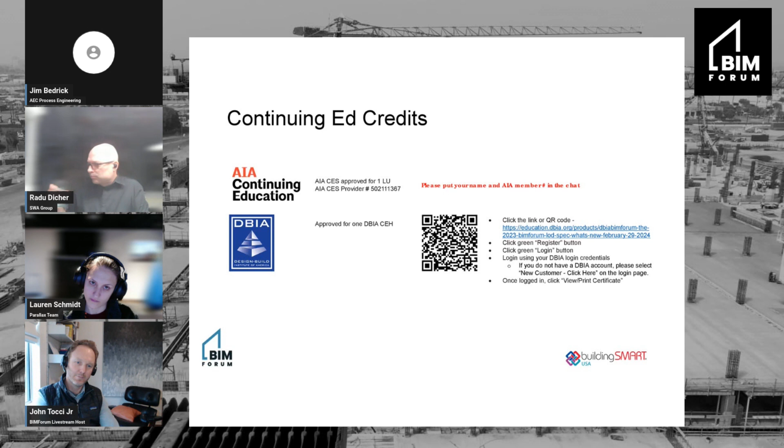So I'm Jim Bedrick. I've been leading the LOD spec effort since its inception about 2011. I'm an architect by trade, but I've worked all three sides of the industry, so I get all of that perspective. And then I also spent 13 years on the AIA Contract Documents Committee, so a lot of that has informed the development of the LOD spec.

We also have Lauren and Radu here from the American Society of Landscape Architects. So Lauren? Oh, we're doing introductions. Yes. Hi, I'm Lauren Schmidt. I'm a landscape architect at Parallax team. And yeah, we are a small BIM consultancy. And I'll let Radu introduce himself.

Thank you, Lauren. Yes, Radu Dicher. I'm the firm-wide BIM manager for SWA Group, the largest landscape architecture, urbanism, and planning office in the US. I basically started in the architecture realm, spent a lot of time in MEP after that, having a background in physics. MEP BIM management is the longest stretch in my career, and 4 years ago I joined SWA to assist with BIM implementation for the landscape architecture projects. Thank you. Okay, thanks, guys.

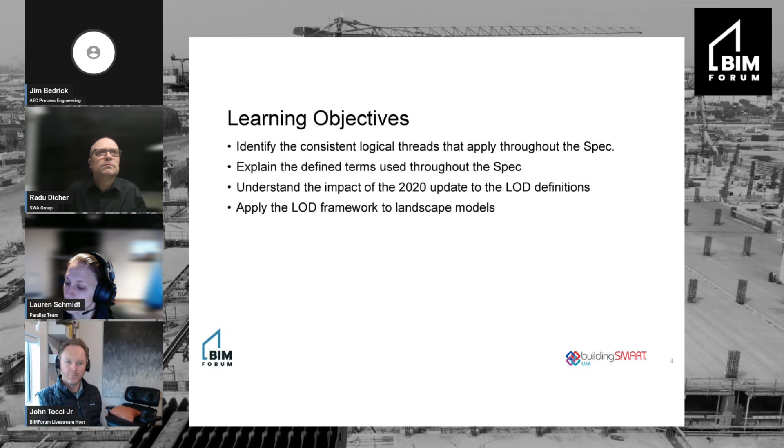So getting right into it, what we want to learn here is, first of all, there are some consistent logical threads that go through the LOD spec, and those have been firmed up for the 2023 version, and we want to be able to identify those. And we've also added a section on defined terms, which we'll get into in more detail. We want to understand the impact of the 2020 update to the LOD definitions. And then we want to get into applying the LOD framework to landscape models, which turns out to be a little bit different animal and was really an interesting and fun endeavor.

So the agenda, we will look at, first of all, what is level of development. Apologies to those of you who already know all about what it is. We usually find in every audience there are a few people who don't know what it is, haven't run into it before. There are some slight misconceptions a lot of the time, so we need to make sure we're all on the same page there.

We'll look at the LOD definitions, how they evolved, and then the 2022 definitions, and the interpretations that BIMForum have made for those definitions to guide the development of the spec. We'll look specifically then at the BIMForum LOD specification, and we'll look at the enhancements that we did in our overhaul for 2023, and then we'll look at those defined terms, and then we'll hand it over to Radu and Lauren to show what we did with landscape architecture.

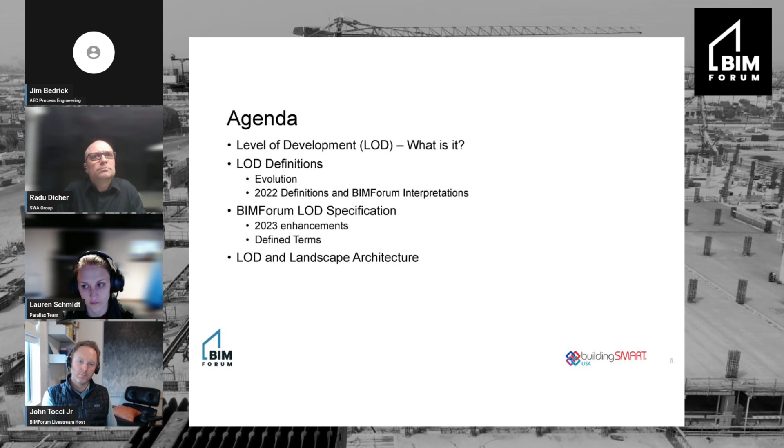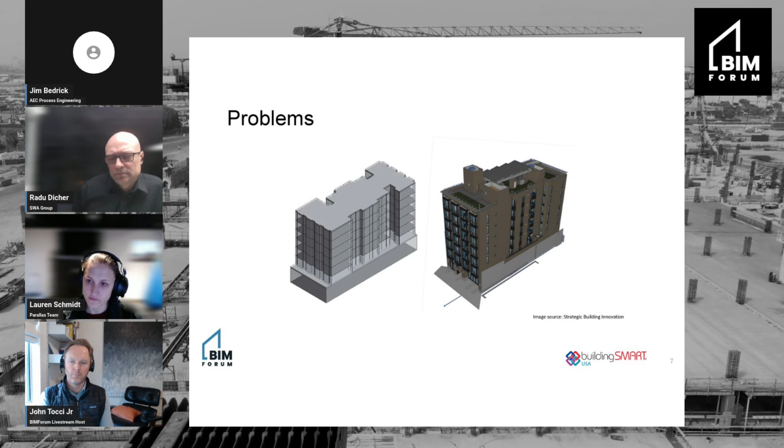So what is LOD, right? Well, it starts out with, we looked at the problem here, which one of these is a BIM, and actually, of course, the answer is both. But given that, then how do you know what you want in a model? How is an owner able to define what they want in a model? How is an architect able to know that they're meeting their deliverables? And the big issue is, how can you rely on a model?

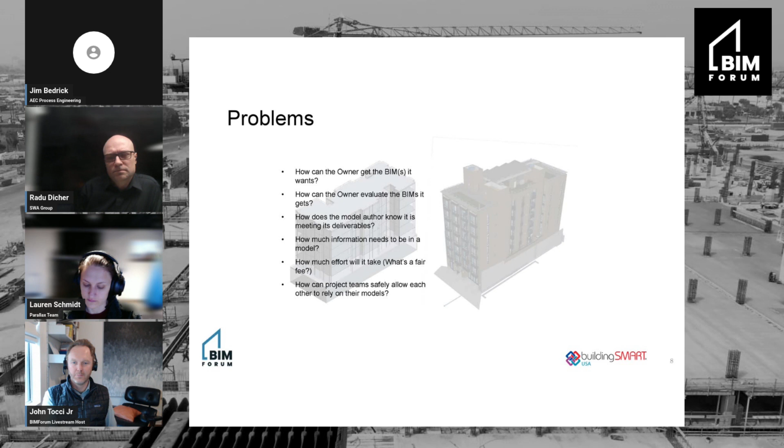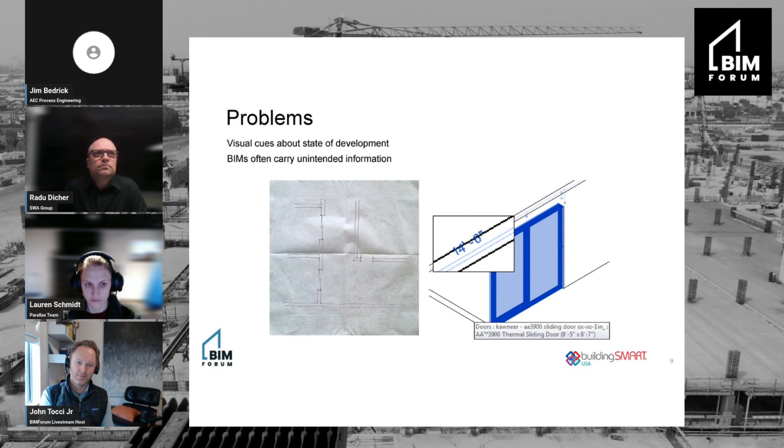So some of the problems that we saw were that when we were dealing with paper, we had visual cues about the state of development. If it looked like the thing on the left, we knew everything was approximate. But the problem is with a model, whether it's at the napkin sketch stage or the final CDs, it looks like the thing on the right. And the model can carry a lot of unintended information. I may have grabbed that door as a placeholder and it happens to be a Kawneer door, but that's not what I'm going to spec. So there's a lot of information in the model that I don't intend, and a lot of information I don't even know about.

So the response to this has usually been this disclaimer that says, pretty much the model looks great so you can look at it, but you can't use it for anything or rely on it for anything, which includes but is not limited to everything. And there's usually some legalese in there that says if you do use it for something and get me in trouble, then you got to pay my lawyers. So have a nice day.

What that boils down to is that everybody was saying, okay, well, some of the information in the model is not reliable, so don't rely on any of it. So basically throw out the baby with the bathwater.

In the AIA, when we got a hold of it in the AIA Documents Committee, we developed this specified use approach. And we said, yeah, some of the information is not reliable, so only rely on what I say you can for the purposes I say you can and to the degree of precision I say you can. So if I've got to specifically tell you that you can rely on something, when I don't mention something, it's something I don't know about, I don't say anything about it, you automatically cannot rely on it. So you don't get me in trouble.

So how do you state all that? What you can rely on and to what degree? That's where the LOD schema comes in. So things progress, systems progress through the design process in varying rates. Usually structure leads everything, interior finishes and casework bring up the tail. So at any given point, things are going to be at a different state of maturity. They all, though, tend to hit some pretty common milestones.

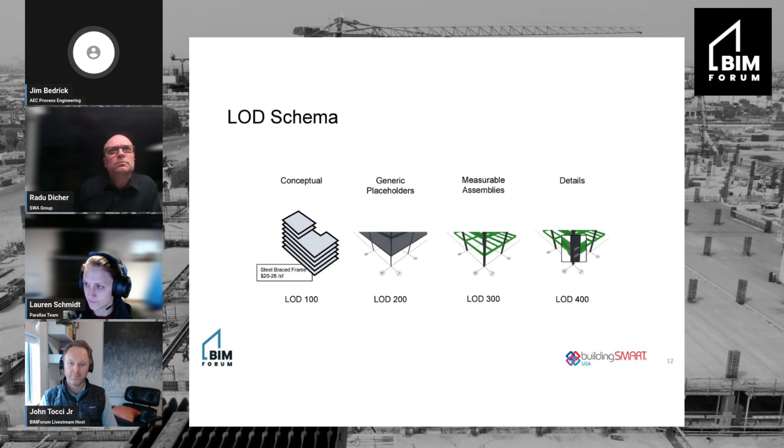You start out with a concept, which might be a cost per square foot on a massing model. You then go further on into putting in generic placeholders. That might be like a rule of thumb depth for the steel floor. And then you get into the specifics. You put in the specific elements that you actually want in the design. And then sometimes you carry those on to further details.

So what we deal with in the level of development spec is this idea of level of development versus level of detail. And it's a really important and sometimes misunderstood difference. Level of detail is basically the quantity of detail. So if you look at this model of a steel structure, it looks like specific steel shapes, right? I mean, they probably are specific steel shapes because I grabbed them from a library.

I can measure their location precisely, but have these shapes been engineered? Are they the ones the engineer calculated out and really wants? And are they in the location that they should be in? I can't tell that by looking at the model. Visual cues aren't there. So I need something else, and that's where the level of development schema comes in. Level of detail is the quantity of detail. Level of development is the reliability of it. So level of development then addresses those last two questions and many like them.

And so has the shape been engineered? If it's LOD 200, no. They may look like specific steel shapes, but they may change. That's not what I'm going to wind up using. And are they in the final location? No, not necessarily. But if it's a 300, then I know, yes, those are the right steel members, and they are in the location I intend.

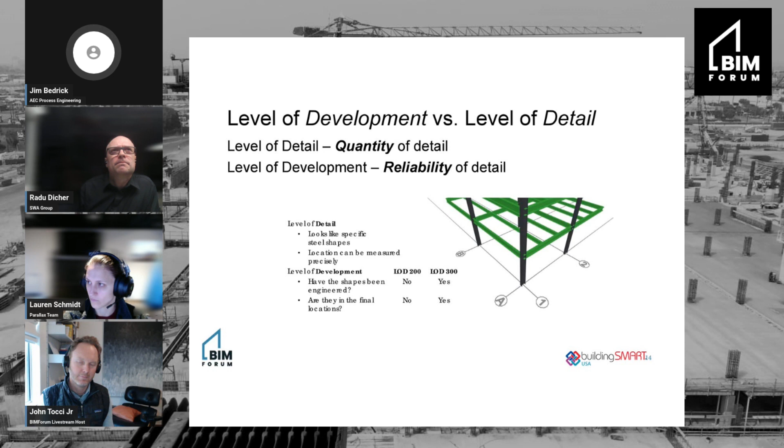Okay, so what can you do with this LOD scheme? You can define deliverables. You can define milestones, like SD, DD and CD, or even 50% of those. You can define information exchanges, such as energy simulation or costing or so on. And you can enable others to rely on your model. So specifically then, you can take a look at this in the handout, but there are a lot of things that you can do with them.

Some of the more useful ones is you can lay out your firm's standards. You can define what your firm means, your firm's business as usual, what we mean by, say, SD, DD, and CD, or as a construction company, what do I need in a construction level coordination model? All right, you can also do a number of different things. One of the key points is you can scope a modeling effort. You can develop what exactly I'm going to have to model, and not model a bunch of extra stuff that nobody's asking for.

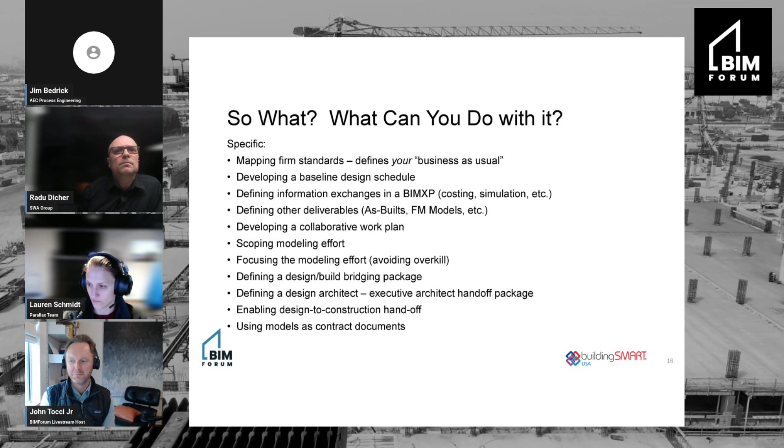Okay, so the LOD definitions. The evolution, first of all, it started back in about 2005 with Graphisoft, and they developed the level of detail scheme to basically control or manage their internal modeling efforts. Well, I was working with Graphisoft at the time, so I took that to the AIA California IPD steering committee. We were looking for something like this, and so that committee morphed it into something more usable, more generally applicable.

And we published it in AEC Bytes in 2008, and the AIA Documents Committee got a hold of it and drafted me to help implement that in a contract, and that's when I started with the Documents Committee. In 2011, then, the BIMForum got together and developed the LOD Spec, and we'll get into why that happened here in a minute.

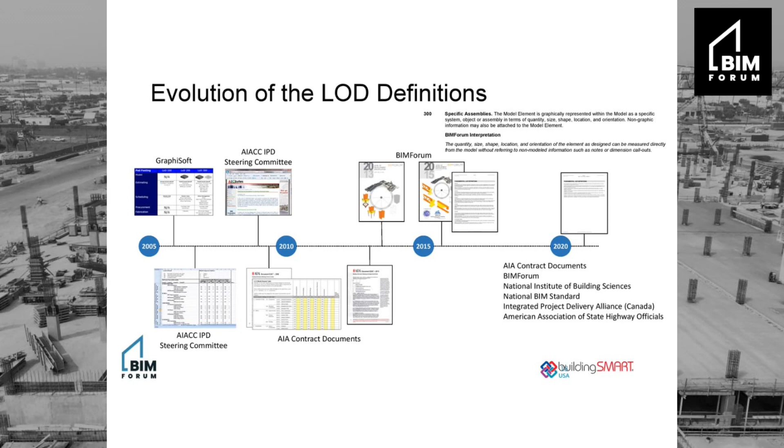In 2013, we developed our interpretations of the LOD definitions. The major one was that we said that at LOD 300, you can measure that element directly off the model. You don't have to depend on called out dimensions. Well, that caused a lot of heartburn at the beginning, but as we went down the road, a lot of designers realized that this is going to save me a lot of work, not having to lay out these dimensions, just putting them accurately in when I'm supposed to anyway. So it became a fairly well accepted principle.

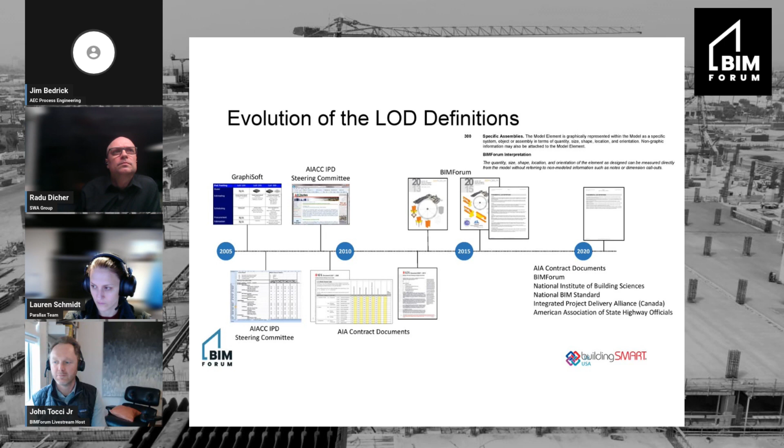In 2020, then, at the beginning, we convened a committee of a lot of different organizations that you can see there, to update the definitions. And what we wound up doing, that committee basically ratified the BIMForum's interpretations and folded them into the new ones.

Okay, so the 2022 LOD definitions. First of all, LOD 100 is pretty much the same as it was. A little bit more detail, but basically it's pretty much anything that's less than recognizable geometry. So anything like a symbol that indicates the location or the existence of an object, or say a space reservation volume. You say, I need a cube this big. I want to make sure that that's a no-fly zone because I might put something in there. Anything that's not recognizable geometry, but you can derive it from the model, is LOD 100.

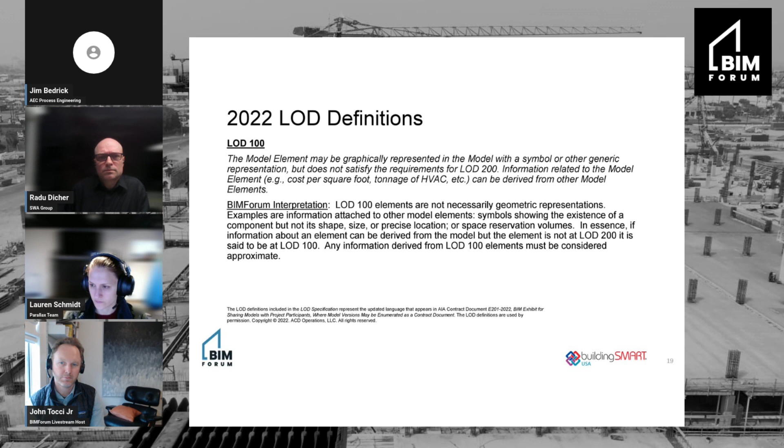200 then gets to recognizable geometry. It's probably a generic placeholder. It's pretty approximate, but I can recognize it. I can see that it's a beam or a light fixture or whatever. 300 then gets to the measurable element. So the definition specifically is the model element as designed is represented within the model such that the quantity, size, shape, location, and orientation can be measured. So that was the BIMForum interpretation of 300 rolled into the AIA contract documents definition.

So basically, our interpretation is that a 300 element is developed sufficiently to fully convey the design intent. Right? Given that, it's usual that designers don't go beyond 300 because they've reached their design intent. Neither the definitions nor the BIMForum specification say anything about who develops the element, but the usual practice is that designers don't go beyond 300.

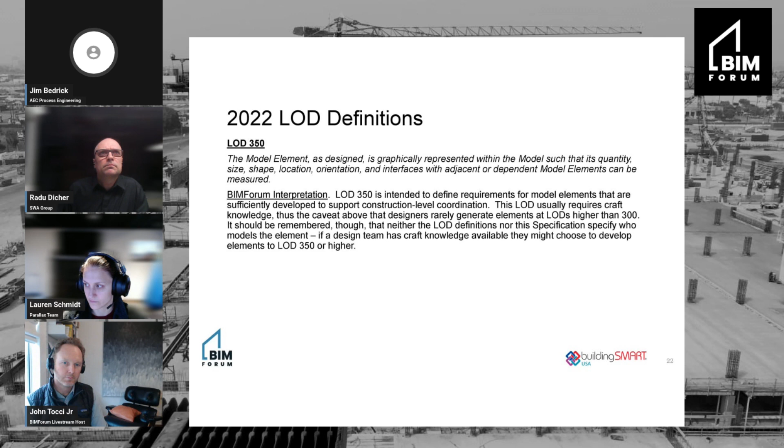350 then is the level needed for tight construction level coordination. And the thing is that 350 usually requires craft knowledge to develop. So seeing that, you can see why designers usually don't go to 350. Nothing prevents them from doing that. For example, if you have a design-build mechanical firm, then they are going to have craft knowledge in-house, and they may well take some of the elements in their contract documents or contract drawings to LOD 350.

400 then is a shop drawing level. So usually what happens is if the specs call for a shop drawing of a certain item, you might model that element at 400. And the thing to note here is that very few things in a model ever get to 400. You'll see sometimes people want to require models with everything at 400. That's unrealistic. Most things in a design model will be at 200 and 300 and even some 100s. In a construction model, they may get to 350, but very, very few get to 400.

Now, 500 is a little bit of an anomaly. The confusion is that it doesn't actually indicate a higher level than 400. This is where we jump to actual measurement of existing objects. So while at 400, the geometry is determined through design, and it's the design of an object that will be constructed in the future.

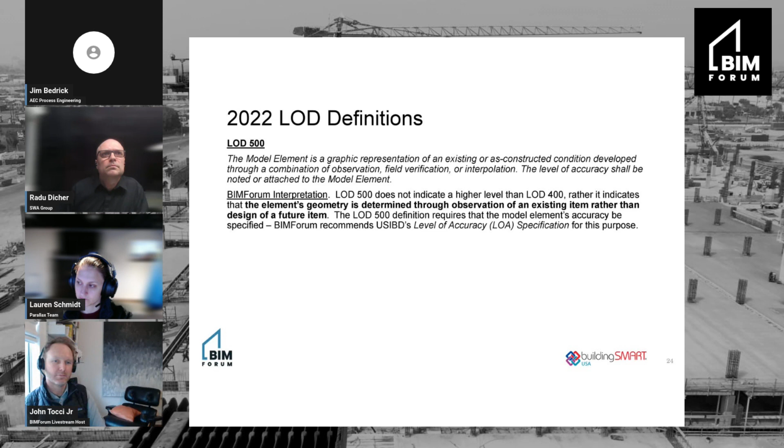Okay, so the LOD specification, these short paragraph definitions were great, but we found that they could be interpreted widely. So what I thought of as a 200 door might not be what you're thinking of as an LOD 200 door. So what we did was got together and defined various building elements at the different LODs. Okay, so this LOD spec is essentially a dictionary.

So now if you want a certain level of development on a door, you want me to model that for you, you can look in here and say, okay, what I'm asking for is LOD 200. So then you tell me that you want the doors at LOD 200. I look in here and say, well, okay, that means this, this, and this is required. And so I model it, and you're getting exactly what you want.

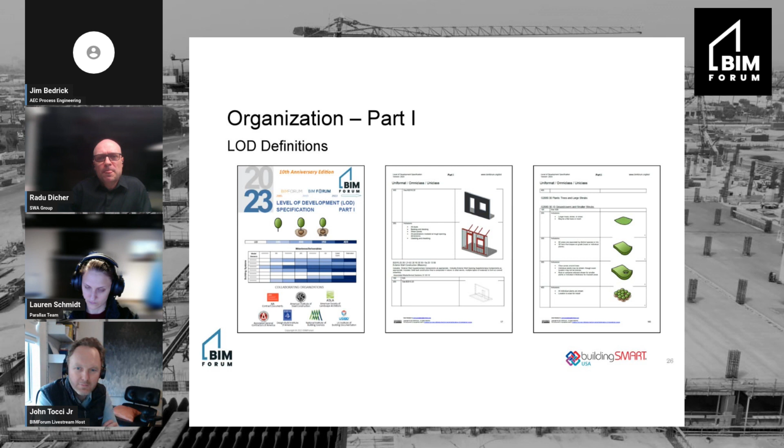A couple of points about the LOD spec, the recent release. First of all, BIMForum has gone through quite an evolution. It started out back in 2005 as part of the AGC, or under the AGC. This is the logo you saw then. And then we went out on our own about 2019, and for a while we used this logo, and now we're using this logo on the right. So all of these logos are actually the same BIMForum. It's just evolved. The one you see on the upper right-hand corner here is the one that will be used going forward.

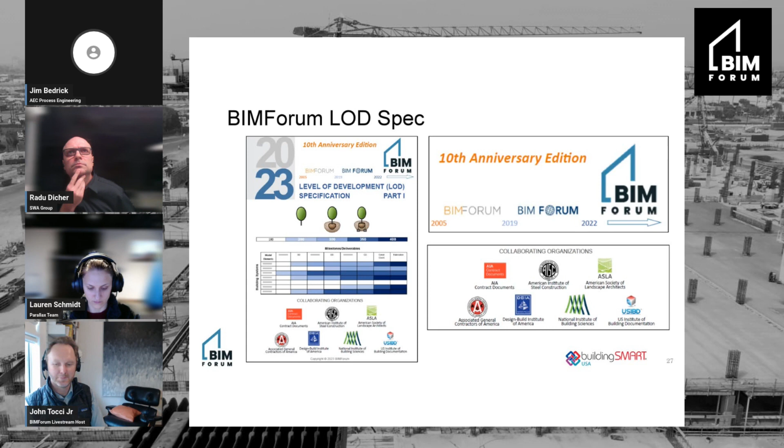Another thing to note is the wide support that this has of major industry organizations like National Institute of Building Sciences, AGC, and so on. All right, so it's very widely supported by industry.

Part 2 of the spec lays out the model development specification, and this is a spreadsheet template that is downloadable with the spec. Basically, the rows are building systems laid out by Uniformat, and the columns are model definitions. So you'll see in each column there will be an LOD for elements that are in that project. There will be a model element author who is going to actually model that element. And then there's also a column for notes.

We couldn't possibly anticipate every variation of how this might be used, so there is a function for putting keynotes in here, and then there's a notes tab. So you can put in things like, okay, we're not going to model any conduit less than 1/2 inch or whatever. Those kind of things are specific to projects, and there's a very easy, obvious, recognizable way to deal with those kind of individual requirements.

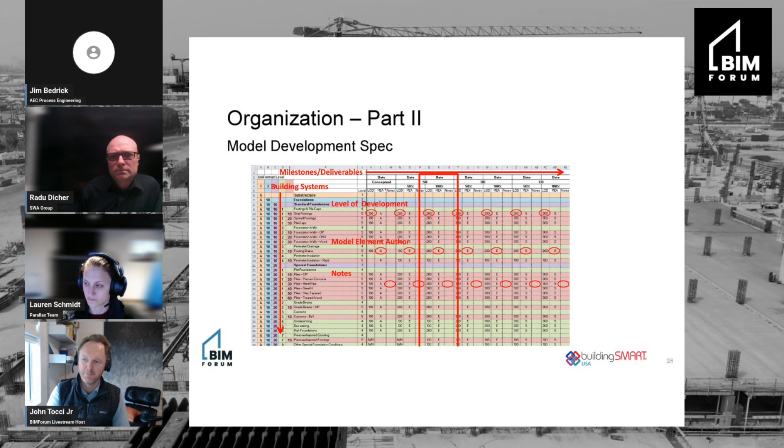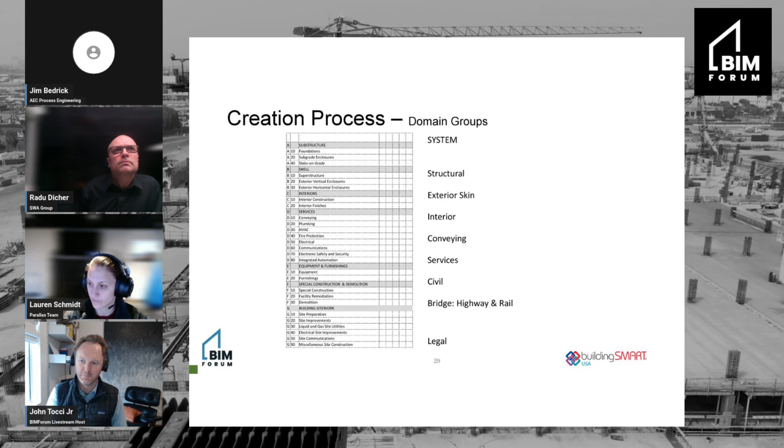The creation process is important because this is why it has become an industry standard. We divide up the 7 Uniformat divisions into some domain groups, and the domain groups is where things start. Each of the domain groups begins the process. They draft the definition that suffices for them, the experts. This then goes to the core group, which contains designers and builders from each of these domain groups. And we go round and round with this thing until everybody comes to consensus on it. So the first draft satisfies the experts. The final draft then works across disciplines.

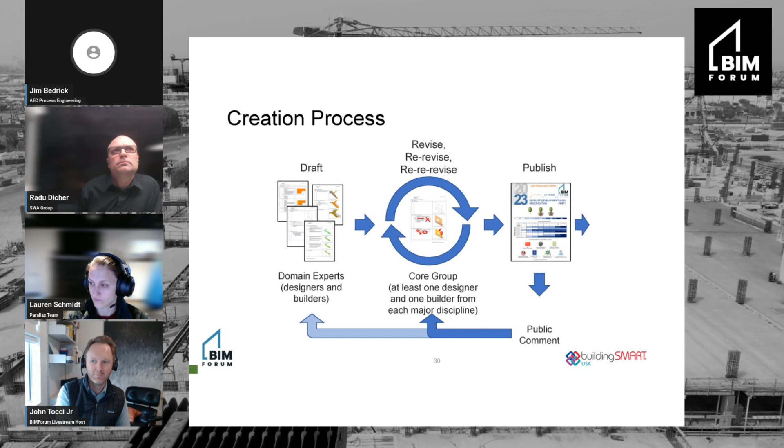The first time we publish each edition, we send it out for public comment. It's clearly labeled as a public comment draft, and we get a bunch of comments back, and a lot of them we can take and go back through the process and adjust things to incorporate what the industry sees, and after that, we publish the final edition.

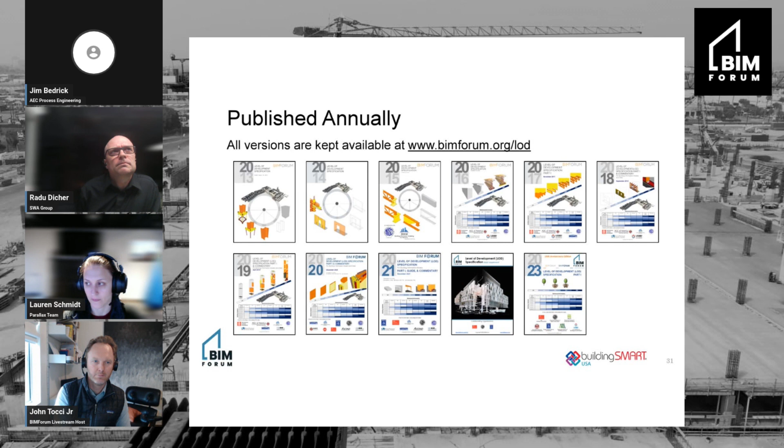We had to strike a balance between being flexible enough to keep up with the developments in building information modeling, but we didn't want to be so flexible that it became too squishy to use as a contract exhibit. So we settled on publishing every year, and we keep all the past versions available at BIMForum.org/LOD. So if you start out in 2019 on a project, you can sign up to the 2019 version. When 2021 comes out, you have the option of going with that or sticking with the 2019 version. So you have the flexibility, but it is solid enough and stable enough that it can be used as a contract exhibit.

So the 2023 overhaul, we didn't add much new content except for the major section on landscape, but we overhauled the spec for a number of reasons.

First of all, we wanted to eliminate nebulous terms. The 300 definition used to say that LOD 300 meant you had to model major openings. Well, we got a lot of pushback on that. What the heck is a major opening? So instead of calling for major openings now in the 2023 version, we call for a specific size. It's usually defined as anything with an opening dimension greater than 6 inches.

And then that is, of course, modifiable through the notes. If you want to not model anything less than 12 inches, you can state that in the notes.

We wanted to simplify things. There were things like in the exterior or interior finishes section, there were a whole bunch of different definitions for different types of finishes, whether it was paint or wall covering or tile or stone facing or whatever. We realized, though, in looking at this, that the definitions, the requirements, were really defined by the thickness of the finish.

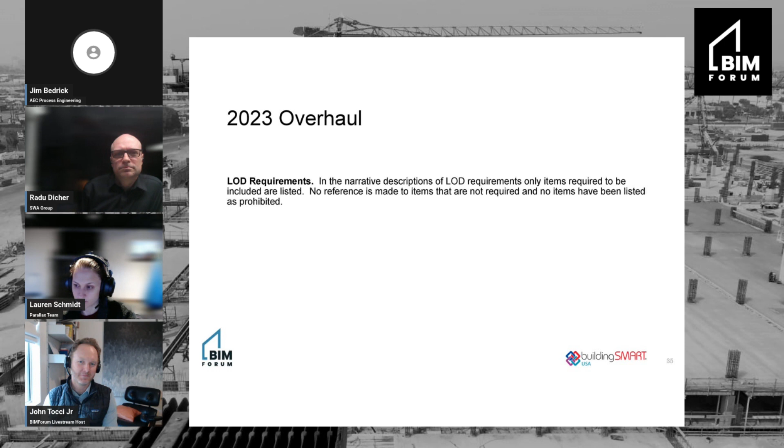And of course, the thing is, the LOD requirements are minimums, right? You can model anything else you want. It's just if you say it's LOD 300, you can't rely on anything above the 300 requirements.

These narrative descriptions used to be kind of paragraph stories. We've organized these and simplified them into bullet lists that act as checklists to make sure you've got all the requirements for the LOD for that element.

And then non-geometric information—there were some places in the previous version where it called for things like the grade of steel or concrete, that sort of thing. We had decided before, but these were kind of mistakes. We had decided before that LOD, the level of development we're dealing with, deals only with geometry. Other kinds of information, like the grade of steel or concrete, can be attached as attributes.

And the thing is that non-graphic information can be attached to any element at any LOD, so it really doesn't depend on the LOD. It's another schema that tells you what information needs to be attached to those elements. And so we took out all mention of non-graphic information in the LOD definition narratives.

We found some duplicated content and either pulled that out or replaced it with cross-references. And then we defined some terms that were used throughout the document but in some cases were somewhat nebulous. These defined terms are up front, defined, and then where they're used in the narratives, they're in boldface, so you know it's a specific defined term.

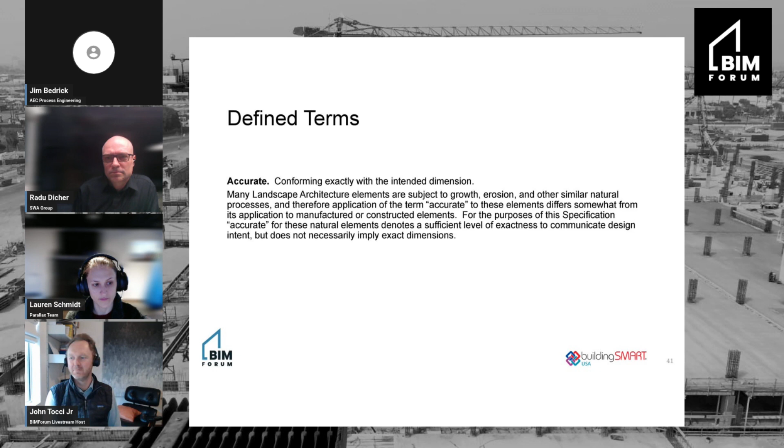Actual versus nominal. What we came up with here was that actual, when we talk about the actual dimension of a rough opening, that's the dimension needed for construction level coordination. Nominal, though, is the dimension that is usually available at the design phase, which may differ from the actual rough opening.

So when you place a door in a wall in a Revit model, it punches a hole, right? That hole suffices for the nominal dimension of the opening, and it may well be a little different from the actual rough opening dimension.

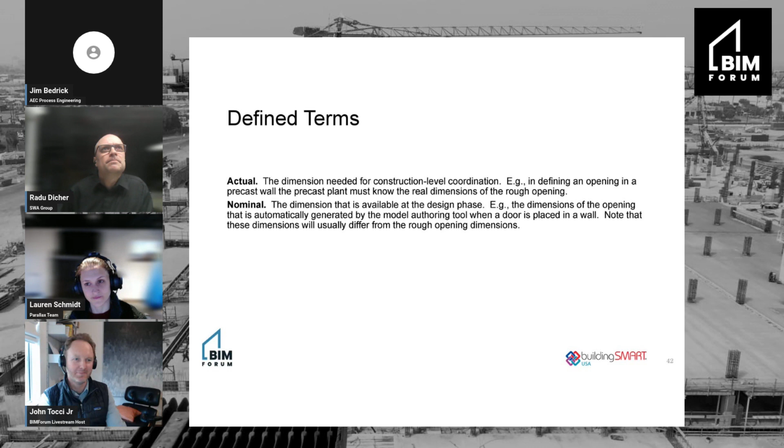We use the term element envelope. We used to call it things like overall geometry, kind of nebulous. So we talk about the element envelope, which is really the extents of the element, basically the exterior surfaces. We use that term both at 200 and 300. At 200, those extents can be approximate, but at 300 they have to be accurate, per our definition of the term.

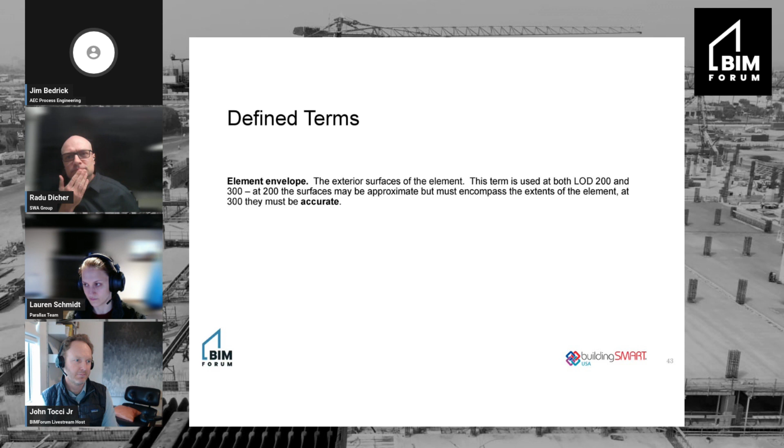Penetration elements were a confusing point at one point. These are elements that reinforce or otherwise enhance a penetration through another element, like a sleeve in a concrete wall where a pipe goes through. What we consistently do now is deal with those under the division of the penetrating element. So a pipe sleeve in a concrete wall is not addressed under the concrete wall, it's addressed under pipes. At level 350 for piping, for example, penetration elements are required.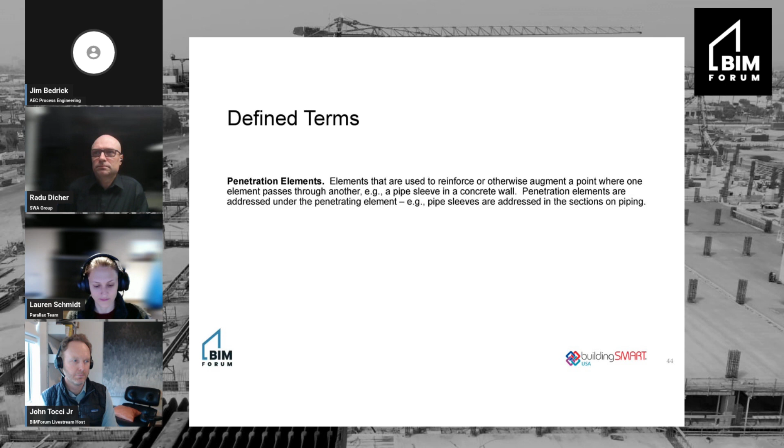We had a little bit on landscape architecture previously, but it was pretty sketchy. This year we collaborated with the American Society of Landscape Architects, represented by Lauren and Radu, and it was an interesting and fun effort because landscape elements are fundamentally different in a lot of ways from building elements. So the schema that was designed for building elements had to be stretched to accommodate the landscape architecture elements. Lauren and Radu, can you take it away and add more color and shade to that?

Definitely, and I seem to be getting some noise. Hopefully that's going to go away.

Thank you, Jim. I'll introduce this section by saying that me and Lauren are co-leading, or co-chairing, the civil and landscape domain group. As introduced by Jim, there's substantial progress with typical landscape architecture scope in the LOD Spec 2023, which was essentially a pursuit within the American Society of Landscape Architects and its core group, the BIM working group, for a while now. But this time we joined the BIMForum efforts to develop the corresponding sections.

Landscape architecture poses some specific challenges, which I'd say are rather unique in the BIM world. To correctly frame the questions, I'm proposing to discuss specific challenges. For instance, there are scope considerations we should take into account, as our scope includes planting soil, items which are subject to growth, erosion, and natural processes which are difficult to account for and predict the behavior of.

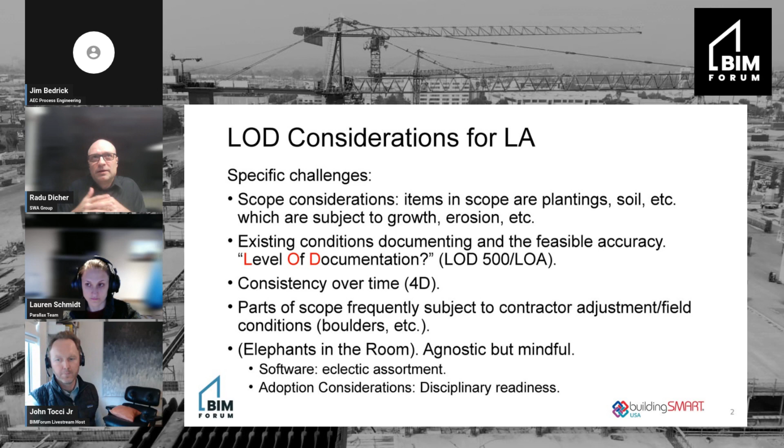But there's also the consideration of adoption of BIM by landscape as we introduce these LOD spec sections, and essentially the disciplinary readiness. I would propose that, as often is the case, challenges are also opportunities for expanding the capacity of BIM to incorporate new types of objects, primarily as part of horizontal project scope. In this pursuit, arguably both landscape architecture and BIM have much to gain.

When working on the LOD spec for landscape, we observed convergence between our solutions and overall considerations with active explorations and research within the BIMForum LOD ecosystem. And Jim, I'm sure could vouch for that.

There's a few concepts which are critical that Jim described and defined, but they factor into our practice maybe more than others, because we're stretching. I think I would posit we're stretching the capacity of tolerance, precision, accuracy, nominal and actual to present BIM product.

In terms of accuracy — and we could discuss definitions for all the other terms — we could examine the absolute accuracy of a position of a real space, of a point in space, which has to do with the field documentation, and the relative accuracy of dimensions between points, edges, and so on of basically items that we design.

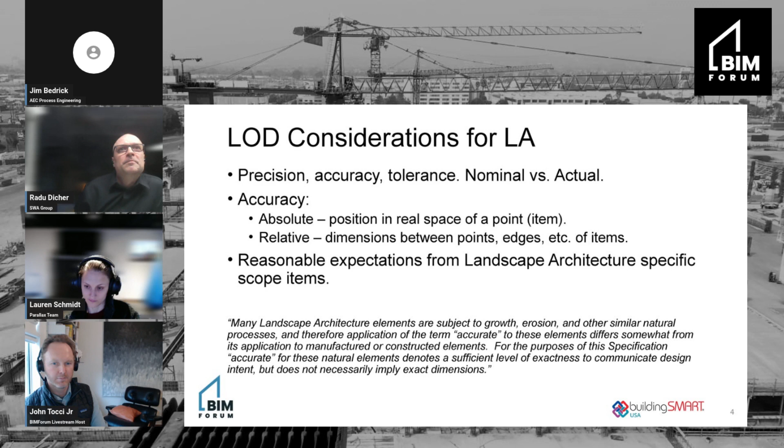That said, that feels like a limitation, but at the same time, I think LA is critical to landscape architecture, critical to the success of BIM, because we are primary representatives of horizontal scope, but also because we execute critical coordination, not only between us and civil, which we overlap on scope with, but also with the building disciplines — architecture, MEP, structure — where in actual projects I feel that we're typically the coordinating tissue.

That we're connecting all disciplines in ways that may have not been done before. I think the critical mission of the LOD spec is to provide the medium for doing that. And I like to call landscape this interstitial discipline that's the connecting tissue of the BIM as overall deliverable.

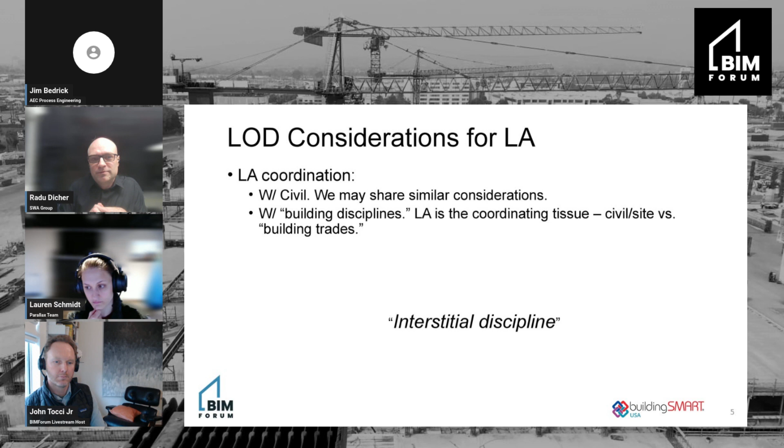Now, being a bit more specific as to how we've written the LOD to account for our scope, a couple of notes — these are sensitive to feedback we received and things we've been thinking of. In Part 2, the notes are available for a couple of additional pieces of information, namely to further refine a certain item's LOD to account for locality or project-specific firm deliverables.

For instance, the trees and large shrubs section for 300 mentions, which is new for the LA spec, canopy size at maturity to be 75 to 100%, or as noted. So 'or as noted' can be part of the Part 2 notes, and can be specific to a 10-year growth or whichever local jurisdictions or authorities want for the canopy to be clashable, or to state scope segregation. For instance, the retaining walls for 350 mention footing to be depicted or designed, but it does not state which discipline is doing that.

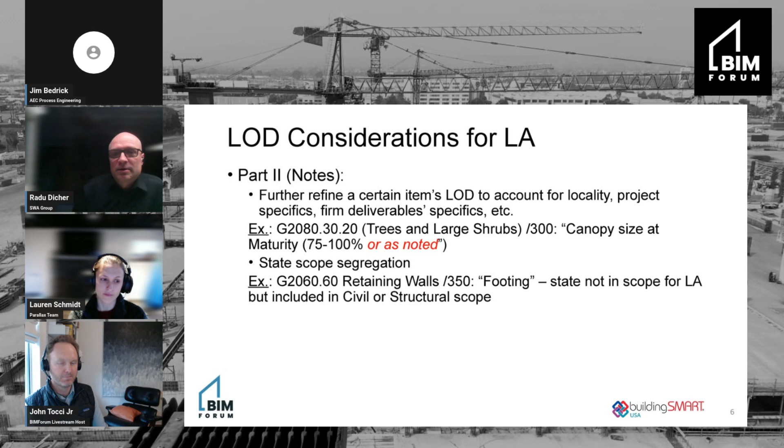Absolutely, it's something that we're seeing in all international projects, and we're seeing it in some domestic projects. It's one of the early coordination efforts that involves us, root balls versus site utilities and major MEP, which may be available at that time, but site utilities are probably going to be able to be clashed early on. All right, let's see.

All right, so in terms of future engagement with tackling LOD specs, we feel that expanding LOD interpretations to additional BIM uses could enhance their usability. And these are sort of just responses to things that we've already discussed or that we've seen as we were looking at LOD Spec for landscape.

Essentially, as we've examined the friction and imperfect translation of legacy LODs with LA scope, considering them through the lens of additional BIM uses provides clues, I think, for further development.

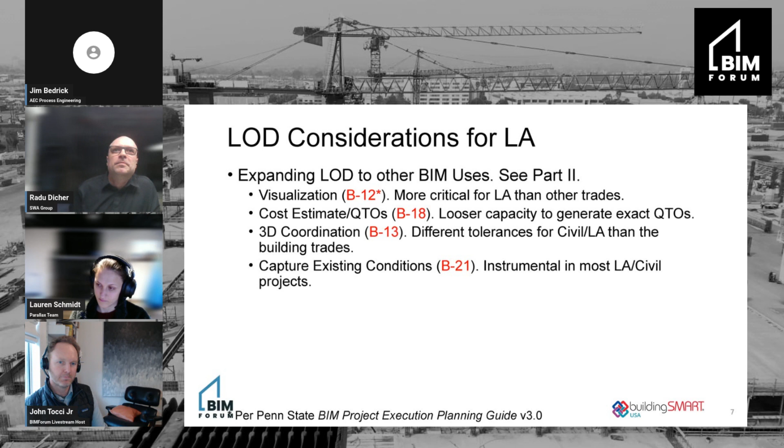And to be a little more specific, we're going to discuss 3 sections. I'll discuss irrigation because I have an MEP background. A lot of this work was basically done within ASLA, but with industry feedback from these contractors to consultants to different partners in projects.

In terms of irrigation specifically, what we've been mindful of is high return items, and we're sort of going, John, to site utilities coordination with root balls. How that connects is that the main line is the item that I think returns high on coordination, and we've been mindful of that.

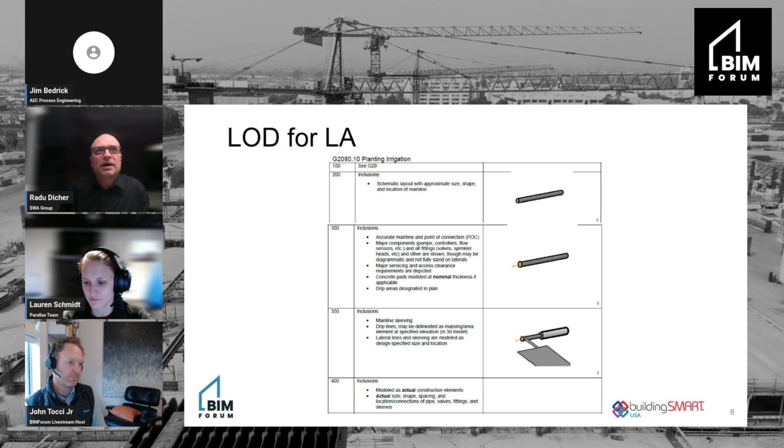Secondly, clearance for access to service different equipment that pertains to irrigation. In the interest of time, I'll keep this very short, and I'll invite Lauren to talk about plantings. Sure, thanks Radu.

I think the major difference that we're seeing in '23 with planting, because we're building off of some existing landscape definitions, was that we specifically broke out smaller plants from larger trees and shrubs. For larger trees and shrubs, it's more important that we have the root ball as a part of that, so we've clearly called that out at 300. Then staking, guying, and attachments is the logical next step at 350.

If you toggle back to the smaller plants for a second there. Thanks. You'll see that we have slightly different requirements here because oftentimes these smaller plants may be just shown as areas, and so we've accommodated that as well.

So at 400, we're basically saying, which is kind of above and beyond what we ever will require at a design level, yes, they're all individual plants, but at the earlier definitions at 300 and 200, they might be shown as areas. So we try to allow for the flexibility for how we often design things within the landscape profession, but keeping in mind those big coordination requirements, particularly root balls for our large plants.

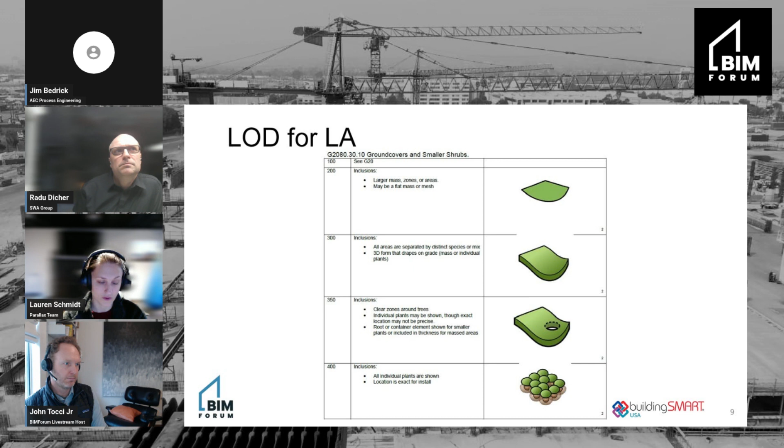And I think that about wraps it up for at least these 3 sections. There are more definitions, and like Radu said, we'll be working on expanding those in '24 with a new round of elements.

To piggyback on that point made by Lauren, and a question in the comments, whether we can expect an alignment with LOIN standard ISO 19650 in future versions: we basically invited for collaboration landscape architects not just within the US, but international representatives of design and landscape architecture practices, and that's the intention.

At least in my mind, I think we should be mindful of the fact that the LOD spec has international visibility and international adoption. And other national institutions like NIBS are basically factoring in ISO 19650 in development of national BIM standards. So yes, I think we'll do that.

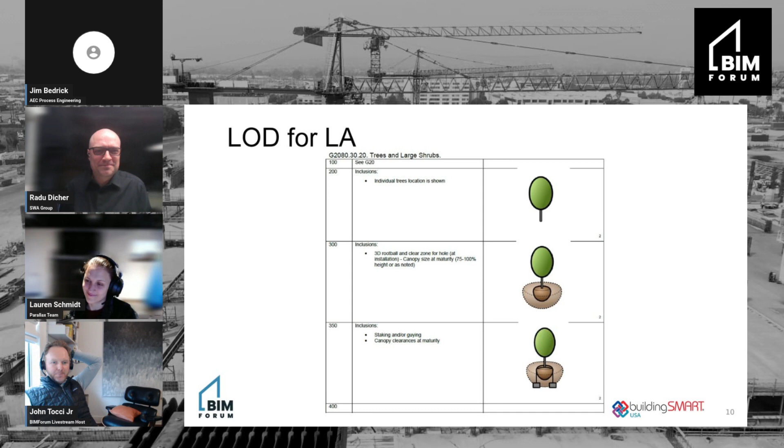So Radu, are you finished? Yes. I mean, yeah, we're in the questions and answers, but we had a question and we answered it. So. Okay, so if I can take this back. Can you make me presenter again, John?

And John, I assume you can see the chat window. Is that right? Yeah, I think everyone can, and Radu answered the only question that really came in.

All right. What about the defined terms that we use throughout the spec? These were things like, what do we mean by accurate? What do we mean by nominal versus actual? That sort of thing. Questions on that? Okay. What about the 2023 LOD definitions? Those of you who were familiar with the previous set of definitions, any issues on that upgrade or update of the definitions? Anything that you see as an issue? Any questions on that?